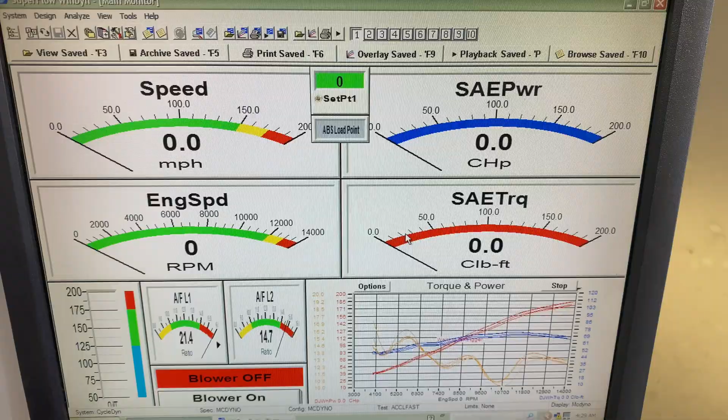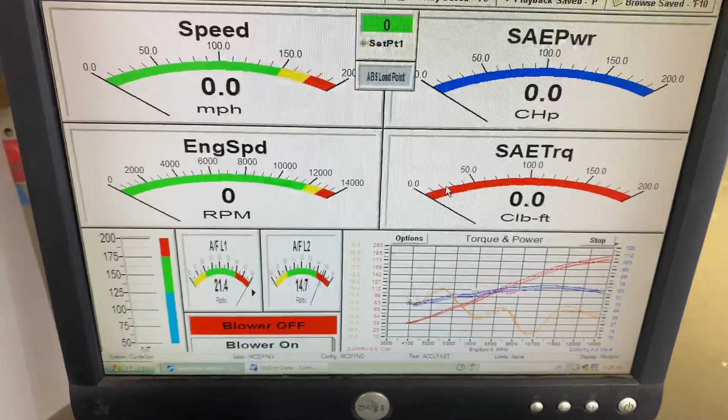So I wanted to make a quick video showing you something I'm working on, something I finished. It's a little dyno project, a little dyno tuning project. What I got here is a Superflow dyno. We just did a dyno run on a motorcycle.

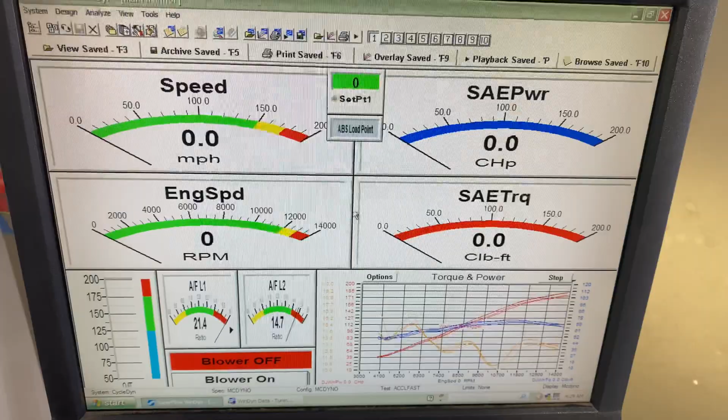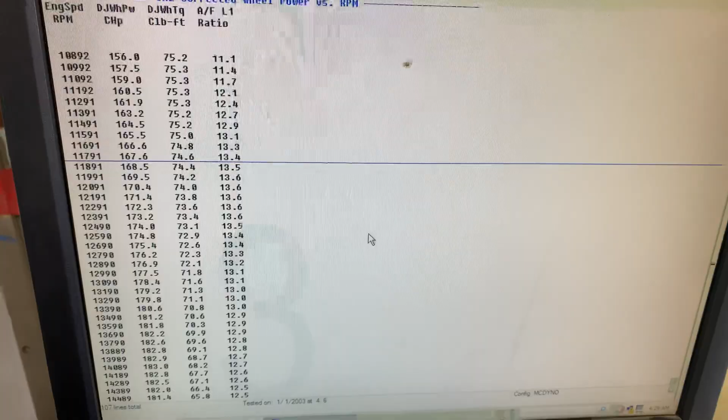And what this thing does, if you're familiar with the dyno, is it saves and records horsepower and air-fuel ratio and tuning and things like that whenever you're doing dyno work. So on this particular run, I actually ran it. It's a GSX-R 1000. I ran it on the dyno, and we've just recorded some data out of it. We've recorded our air-fuel ratio.

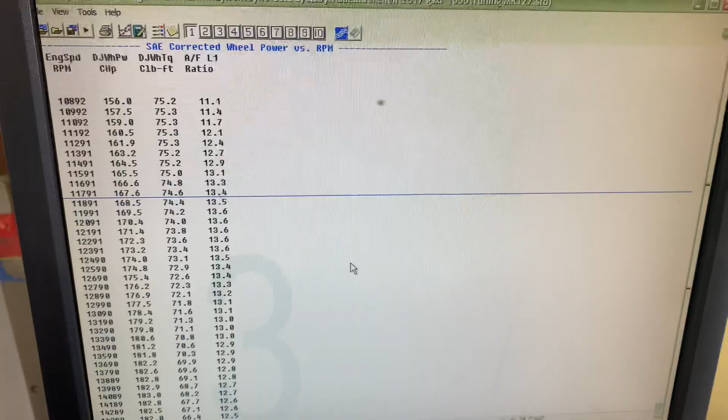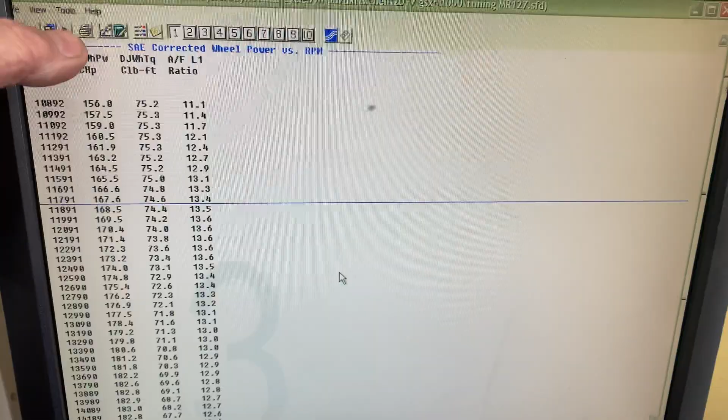And I won't get into the explanation of what air-fuel ratio is. I'm hoping that you already know what that is, and also the understanding that the dyno will capture that information while the motor's running and being run at wide open throttle. So what it does is the dyno calculates horsepower and torque. This is the horsepower channel of all these values.

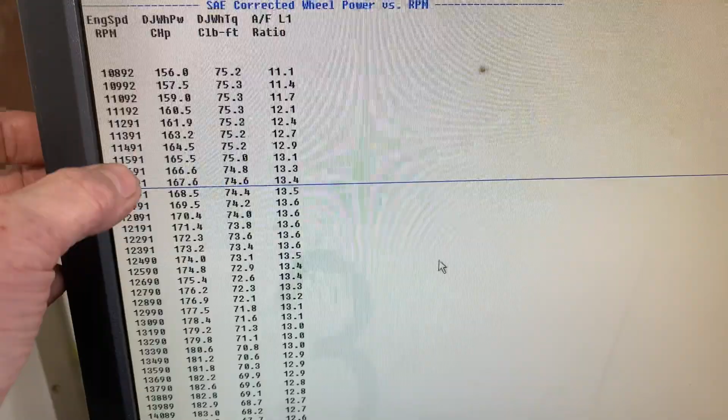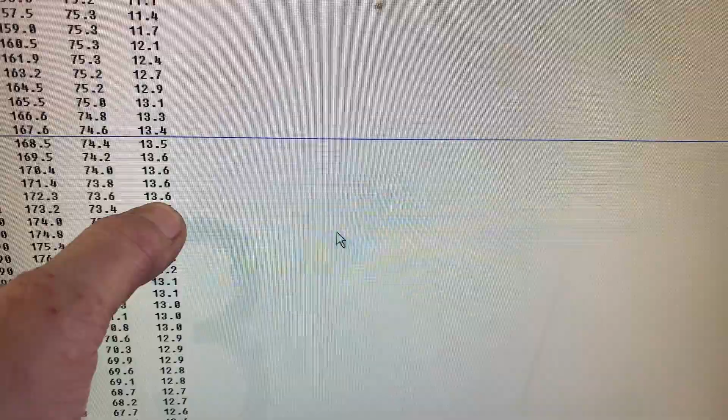This is the engine speed as it's running up through the RPMs: 10,000, 11,000, 13,000, 15,000. This is the power that it's making for every RPM point. This is the torque that it's making for every RPM point, respectively. And also, this is the air-fuel ratio that it's recording at the same time. So whenever it's at, let's say, 12,000 RPMs, its air-fuel ratio currently at that spot is 13.6 to 1.

So what happens is a motor likes to run and will make its best power at certain air-fuel ratios. This particular motor will probably make its best power and run its best around 12.8 to 1 air-fuel ratio. Well, currently it's too lean. It's 13.6. We need to richen it up to get to 12.8 air-fuel ratio.

So what I normally have to do is fumble around with a tuning laptop and a calculator, or the calculator app on my phone, to do this calculation. And it's not just a simple one operation. You have to do a little bit of math to figure out what you need to get to 12.8 to 1. So how do you do that?

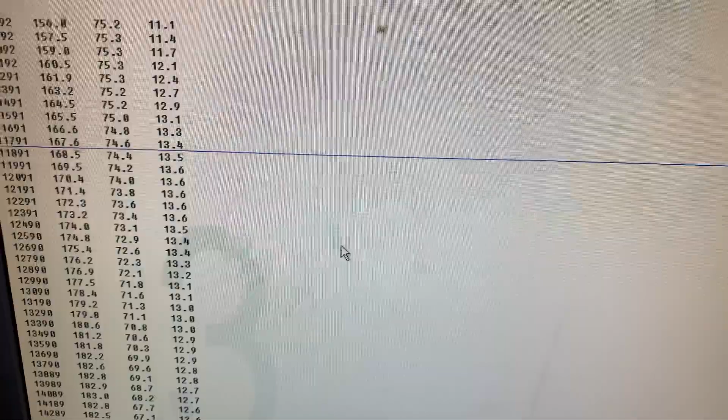So if I was tuning this bike right now, this is the fuel map from the kit ECU. It has RPMs across the top. This is the throttle position. And these are the fuel values that it's using while it's running. So as you're accelerating wide open throttle on the dyno, it's coming across here and using these values across the bottom as its fuel values.

So at 12,000 RPMs, it's using 7.81. That value right there is 7.81. That's the value that the ECU looks at on the map and says, okay, I need to inject this much fuel according to this value, and it'll inject more or less. The bigger the number, the more fuel. The smaller the number, the less fuel.

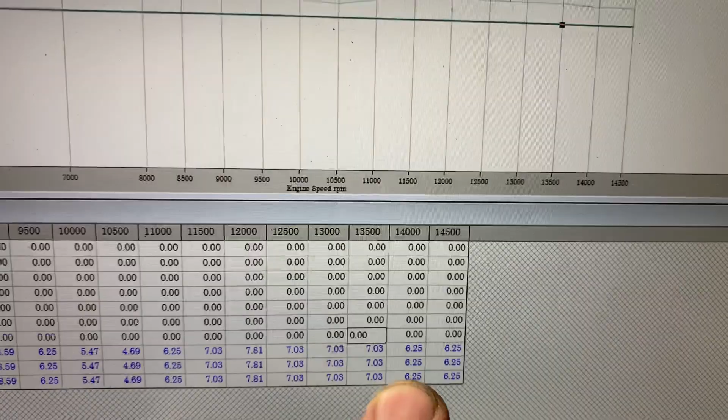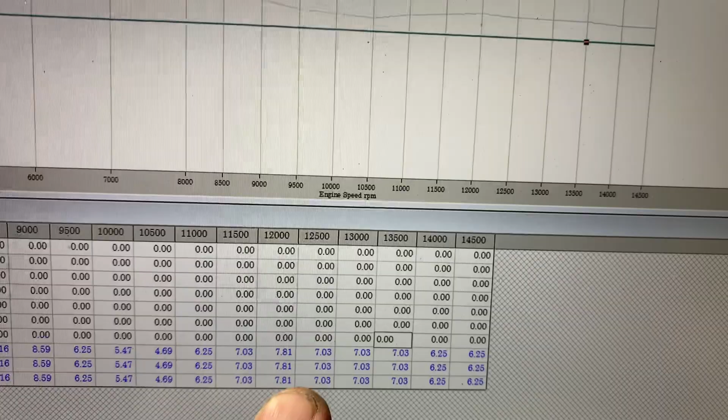So right here, it's injecting more fuel. Over here, it's injecting a little bit less. It's 7.03, and it's continuing to use this. And then even at the end, it's injecting even less at 6.25. So right now, the bike's too lean. I need to add more fuel in this section right here, as we recorded 13.6 at 12,000 RPMs. So how do I do that quickly?

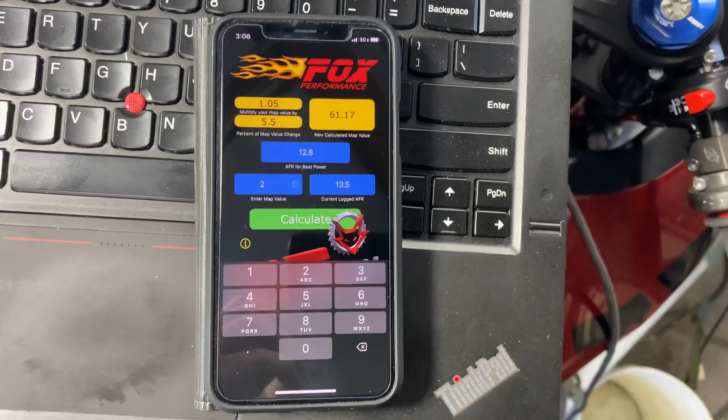But anyway, here's how it works. So you enter in some basic values.

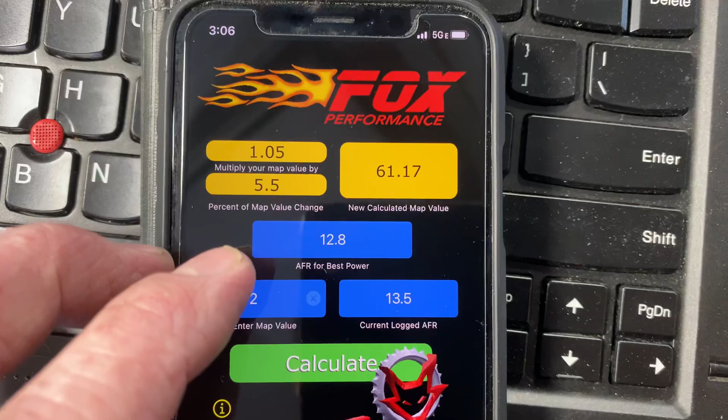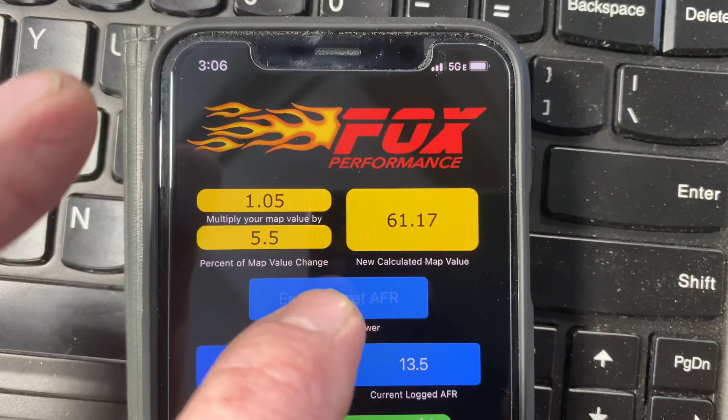Here's my basic value right here. My air fuel for best power, that's my target. That's 12.8. That's my target AFR. So if I put in 12.8, whoop, I'm doing this while I'm looking at the camera. Okay, so they're entering in 12.8.

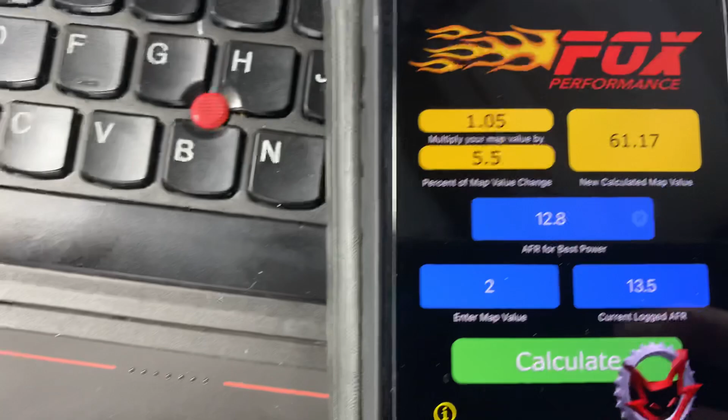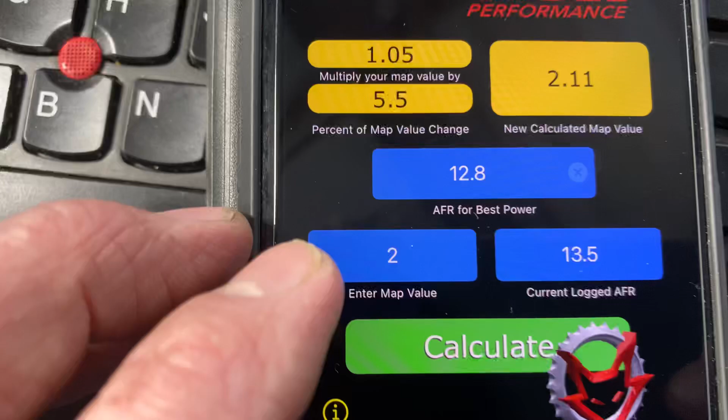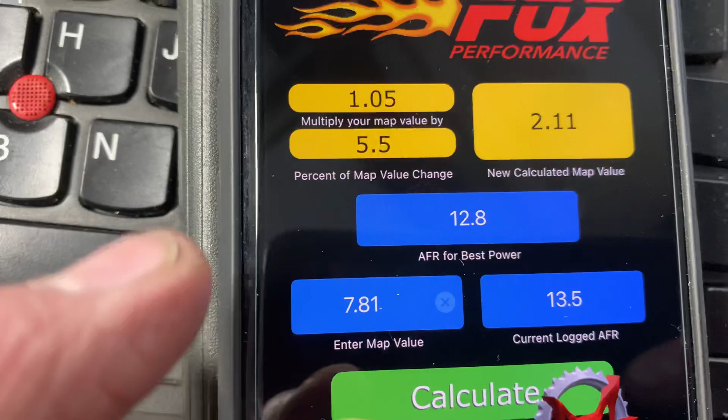So now I need to enter in my map value. Now that's the value over here, this 7.81. If I take this map value, clear that, enter in fuel map, 7.81. And now what I need to do is I need to enter in my current logged air fuel ratio. That's the value I just showed you on the dyno that it recorded while it was running. So it's 13.6. 13.6. So now I've entered in the important stuff, press calculate.

So here's what happens. It calculates for you what you need to make your new map value at. So right now it was at 7.81, which I showed you over here. It was 7.81. My new value needs to be 8.3. So that's a 6% change. I need to richen up the fuel tuning by 6%.

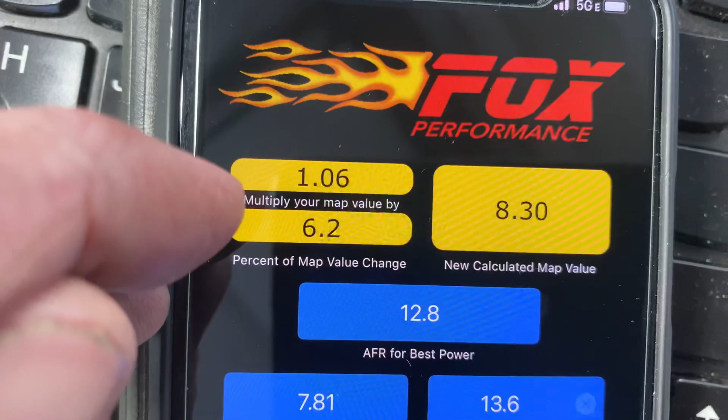You can see up here at the top, it says multiply your fuel map. This is just a reference to show you what it's doing. It says multiply your map value by 1.06, which is 6%. And the percent value of the change is 6.2, technically. If you wanted to get more decimals in there, it's 6.2%. But it's that simple. That's all you do.

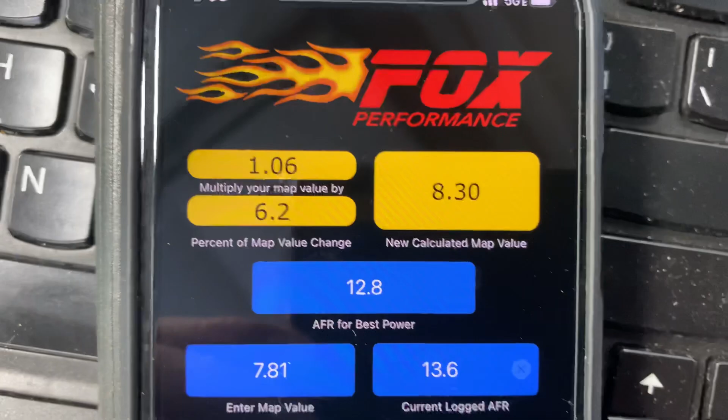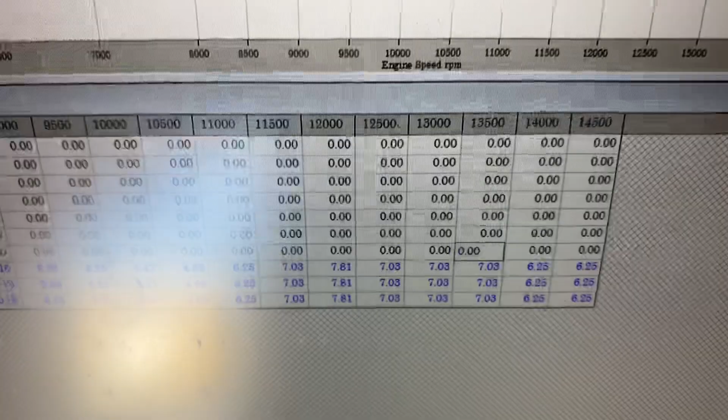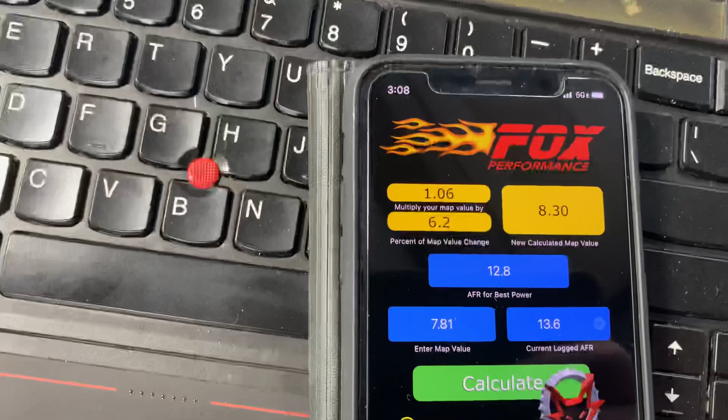And then you take that value and you enter it into here, replace that 7.81 with the new value of 8.3, and then you run the vehicle again. You run the bike on the dyno or whatever, the car, anything like that, and you keep repeating this process until you get your fuel tuning to where your air-fuel ratio is correct across the entire RPM range.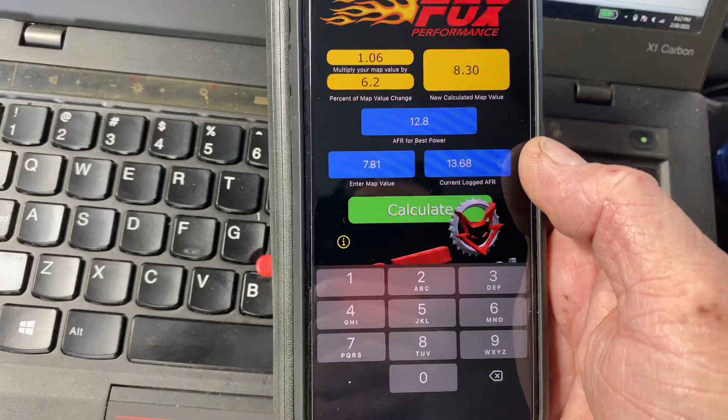So it's really fast. I really wanted something that I didn't have to fiddle around with multiple calculations on a calculator, and something that was really handy and quick with my thumb right in this region right here, so that I wasn't making massive movements and I can get through it quickly. It's made for speed, really. A lot of time is wasted fiddling around with little things, and I wanted to be as efficient as possible with this.

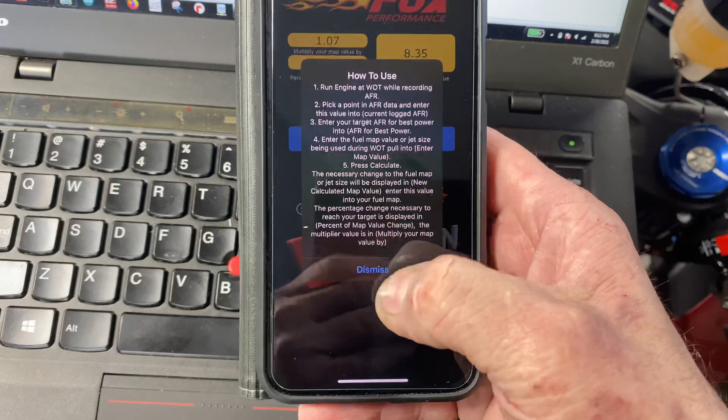So there's a little info button right here. If you press this little info button, it tells you how to use it. There's little directions there, and that's it. It's really basic. It works exceptionally well and is very fast, and like I said, you're not fumbling around with a regular calculator.

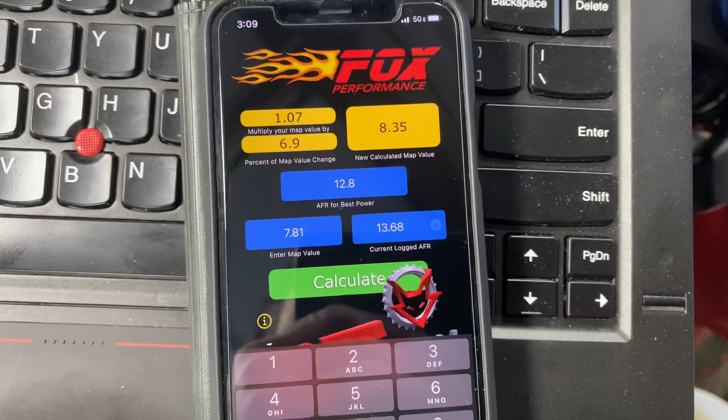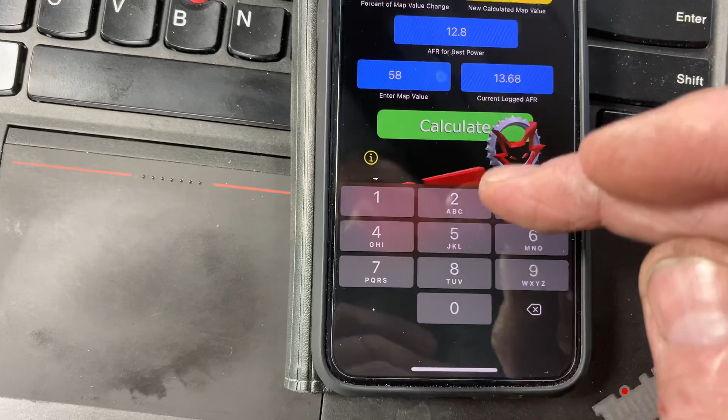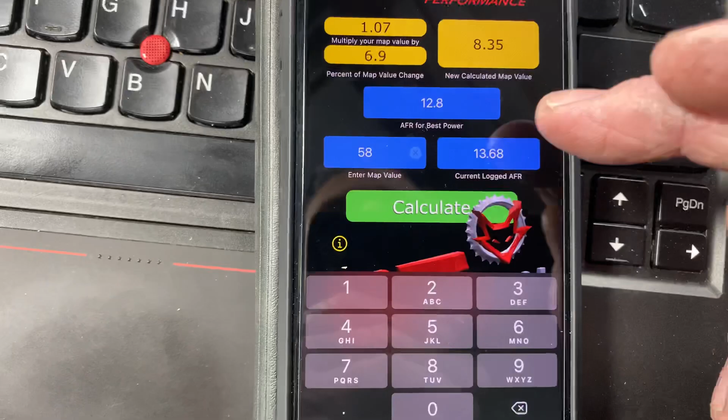The other thing, this is for car guys. I do a lot of car dyno tuning as well. Let's say you're running a Holley carburetor, a Holley 600, and you got a 58 main jet in it, and your target air fuel ratio is 12.8. This is a Chevy 350 or whatever, big block, and you do a run on the dyno, and you come up at 14:1.

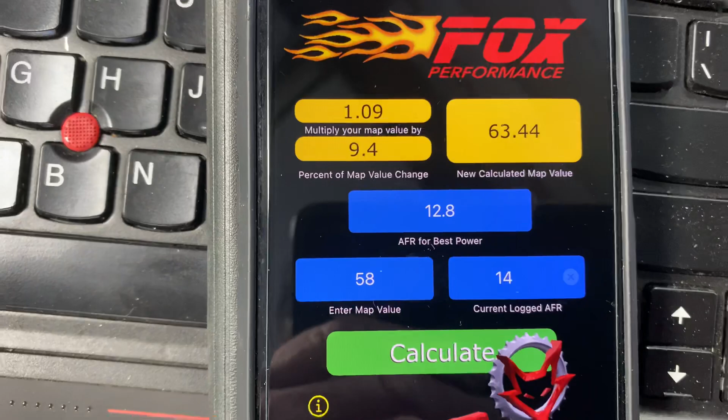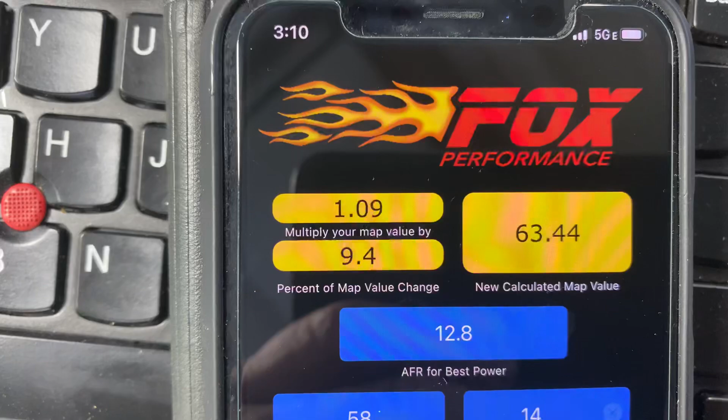Press calculate. Your new main jet size is now going to be a 63, which is closer to a 62, or I don't know if they make an increment of 63, but you get the idea. You need to make like a 9% jet change. So you go up 9% in your jet size and run it again, and you'll be closer to your air fuel ratio. So there you go.